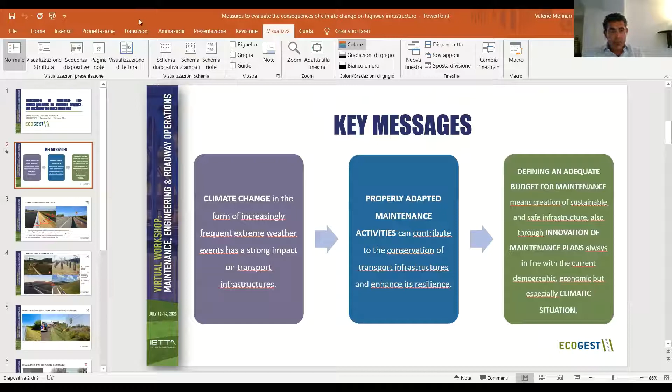Climate change and its impact on transport infrastructure show how properly adapted maintenance can contribute to the conservation of any transport infrastructure. Maintenance is a fundamental part of expenditure items determining the annual and multi-annual budget, and must include every work, also those often considered residual, such as maintenance of highway drainage systems or green areas.

When planning and design take place according to correct agronomic and ecological principles, the vegetation preserves the nature of the areas, biodiversity, and reduces management and maintenance requirements.

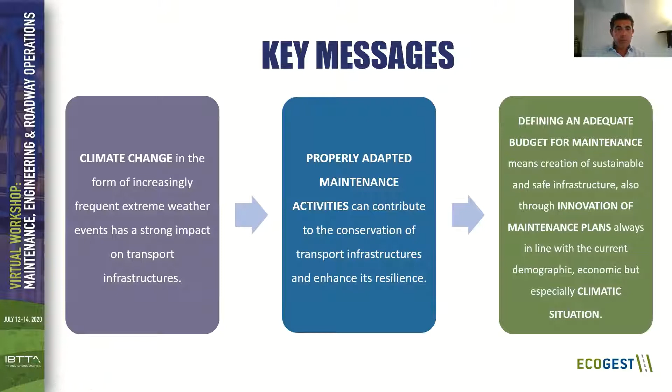The design models used to date are no longer consistent with meeting the optimized maintenance cost. A correct programming of green areas maintenance activities on highways requires targeted and specialized intervention derived from a real need for that intervention, also in line with the vegetative development dictated by the constant changing climate.

In these two pictures, you can see how a correct design of drainage features and landscape integration have an important safety function for the end user.

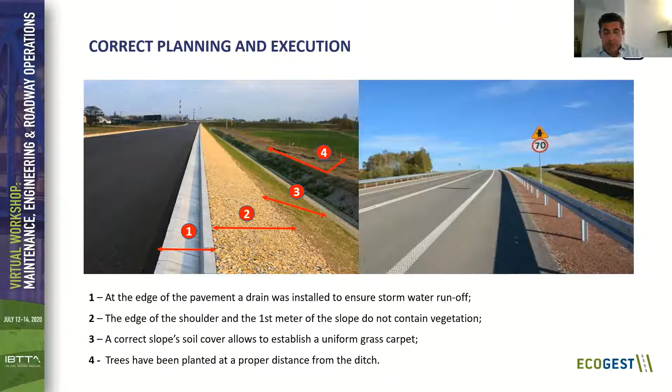The highway drainage works should also be adapted to climate change. The cutting of properly sized and correctly maintained concrete ditch guarantees the stormwater runoff even in the presence of extraordinary weather events. When we think of soil protection, we must think of a combined effect between a reinforced concrete structure and the surrounding area.

There are pressure hydroseeding techniques capable of forming layers with a thickness of up to 3 centimeters, and this technique allows establishment of thick and uniform grass cover, and it is often used as an erosion control technique.

'With what remains, we will plant some trees.' This sentence is all too often used when analyzing a project, especially when making an economic offer. Plants must be evaluated not for their cost or for their name, but solely based on characteristics that must be compatible with the surrounding environment.

Native species is the only valid procedure capable of guaranteeing a successful plantation.

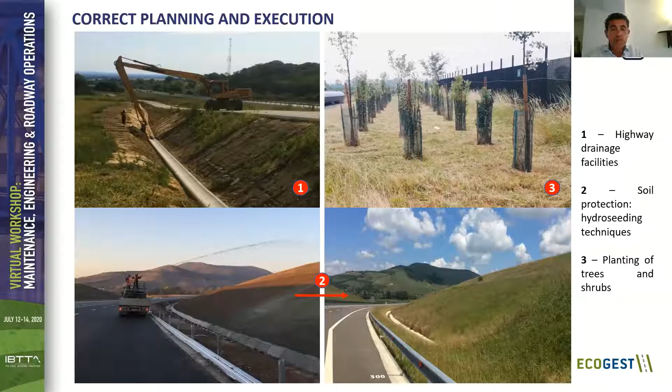In this slide, it's easy to notice how correct and constant maintenance of the green areas allows us to guarantee safety, visibility, and the correct use of spaces, without forgetting the aesthetic value of the works created.

On the other hand, the lack of adequate maintenance of green areas and slopes on areas near bridges and all the structures along highways, but also drainage facilities such as cleaning of ditches, culverts, or road crossing tunnels, leads to a real weakening of infrastructure and the needs of the landscape that hosts them.

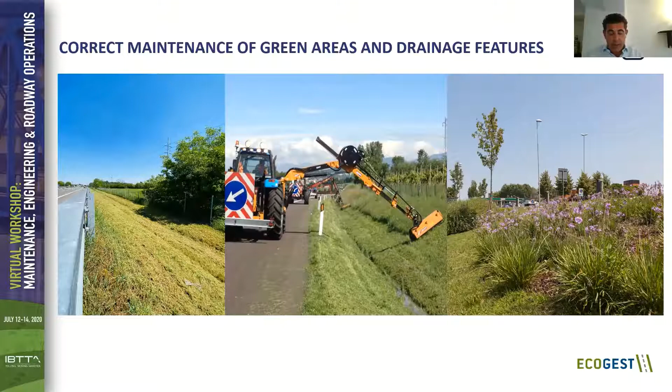The cost of this extraordinary intervention exceeded the ordinary maintenance cost by over 700%.

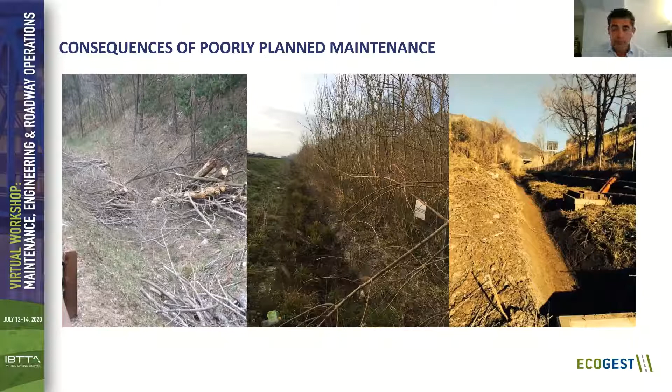Exposing reinforcing bars and generating an impoverishment of the porosity of the concrete itself. Vegetation maintenance working specifications that include weed removal on bridges, viaducts, and overpasses almost never explicitly mention it, and the consequences of these technical deficiencies are evident.

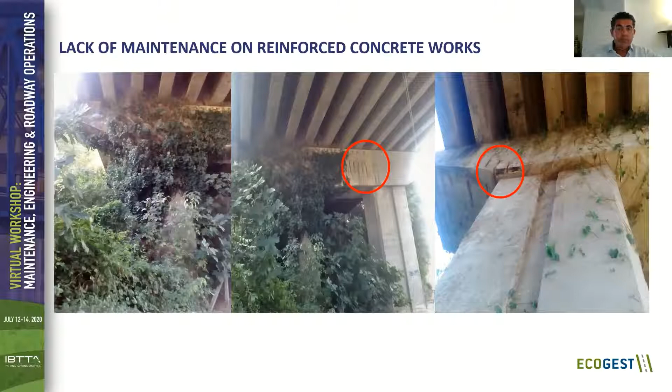The lack of control of invasive species growth, becoming more and more present also due to climate change, can create borderline situations where ordinary maintenance is no longer sufficient to guarantee a current state of conservation of the green areas.

Ligustrum lucidum, Robinia pseudoacacia, Ailanthus altissima, Acer negundo, and Ambrosia artemisiifolia are the 5 invasive species with the greatest impact and the fastest growth, and they can reach dimensions and heights over 2 or 3 meters. They may cause the outcome of new respiratory allergies that might interact negatively with existing respiratory disease to the detriment of public health.

To the detriment of the public health, therefore they deserve to be included in maintenance programs as elements requiring primary control.

I wish to thank you for the opportunity you gave us and for your attention. I think nothing better than the Cassandra project, which you are now going to see in a sort of world premiere, can make a concrete and visual sense of how the impact on any infrastructure can change its condition and duration in relation to maintenance techniques and choices. For this reason, I give the floor to architect Mark Canata, together with architect Antonio Stornello, who in collaboration with Ecogest has developed a new mathematical and computer model whose peculiarity is the possibility of being applied on a parametric basis to every infrastructure and every part of it.

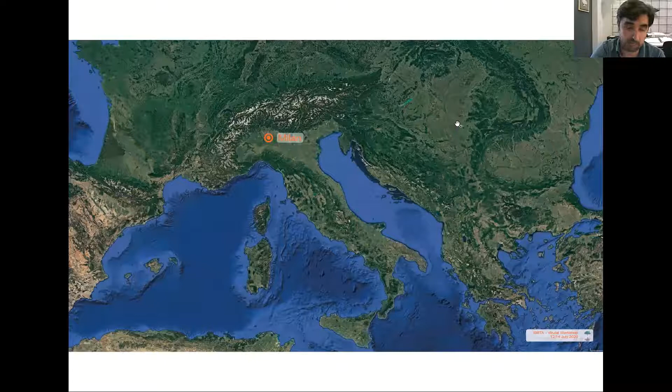But today we would like to talk to you about the pilot study we are undertaking with Ecogest in Italy. The motorway we're focusing on is the A7, which leads south from Milan towards the port city of Genoa, crossing one of the most densely populated and polluted areas of Italy, an area likely to be even more prone in the future to higher temperatures and extreme weather events, such as destructive storms, due to climate change.

We are looking generally at urban motorways, or those high-volume roadways that cross areas on the outskirts of cities, often characterized by proximity of commercial or residential buildings, low-quality verge vegetation, agricultural land, and pockets of residual natural landscape.

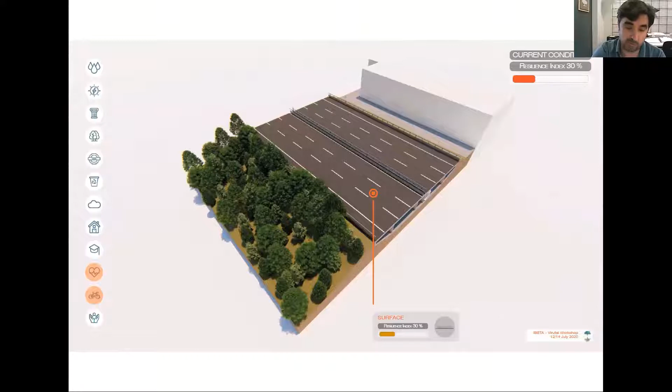If we look in detail at a 100-meter stretch of this motorway, we can see how each element contributes to the overall resilience index, and importantly, how each element has an effect on the resilience index of other elements. Clearly, all these elements are interconnected and impact on other parameters such as air quality, water management, and safety. The combined result in this case is an unsatisfactory overall resilience index of 30%.

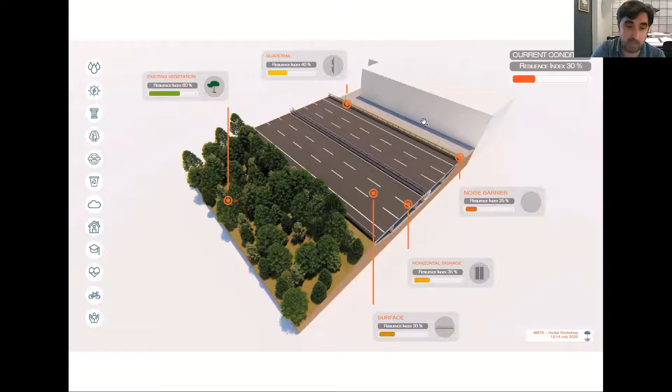So at this point, having established a baseline with the existing condition, we can proceed to create various scenarios to increase the resilience of the asset while balancing it with cost, verifying for instance what the effect might be if the road surface was changed to one that improves drainage, which in turn improves safety, or one that has increased solar reflectance index.

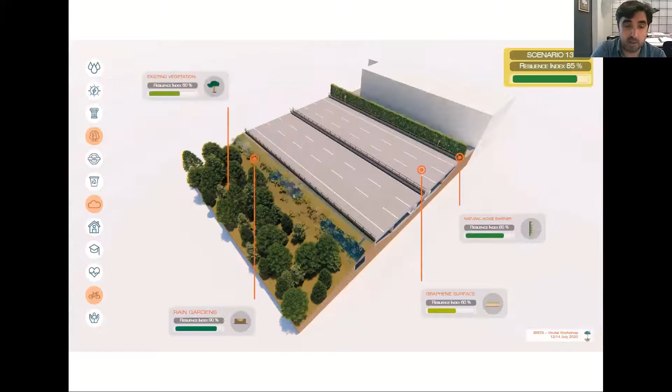And what if we added more kerb drainage points and connected these with rain gardens, which allows us in turn to consider different types of vegetation, such as bushes and high CO2 absorbing trees that reduce the maintenance load and costs, improve air quality, and importantly, can dramatically increase local biodiversity.

Similarly, the combined impact of increasing the solar reflectance index for the road surface would reduce the heat absorption in the area. It is this interconnectedness and whole system improvement that exponentially increases the resilience of an environment such as this one.

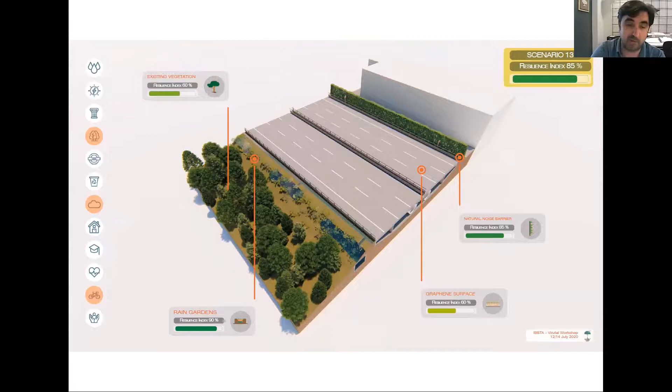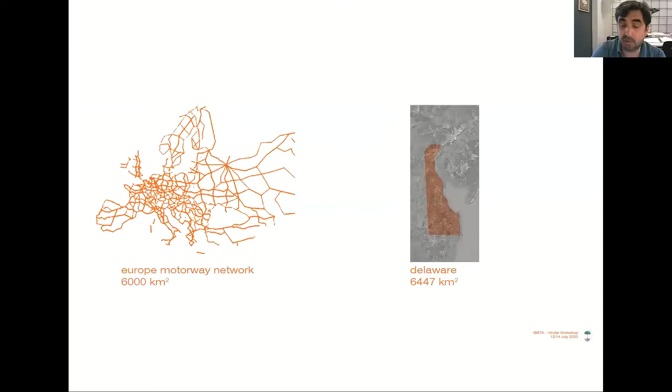Imagine what the effect of individual changes such as these could have when rolled out along the 100 kilometers of the A7 motorway, where the verge area, if considered altogether, is a green area equivalent to Central Park. If you consider doing the same for the entire European motorway network, you would have a linear park the size of Delaware. Or if you looked at the US highway network, you could have potentially a green area the size of Connecticut—a biodiverse area larger than Yosemite and Yellowstone put together.

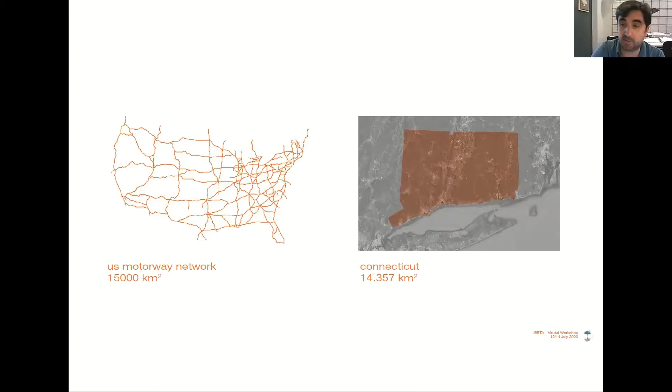So taking a whole system view and considering the combined effect can significantly improve planning, resource management, efficiency, and cost. At the same time, it allows for an enhanced natural and built environment and improves the quality of life of users and inhabitants.

Cassandra allows for the opportunity to acquire a large quantity of diverse data and manage it via a virtual platform, through which it can be communicated in an easily understandable way, facilitating decisions. Ultimately, we like to say that Cassandra allows you to see what is there and foresee what the future might be, so that the path to the best possible future can be laid.